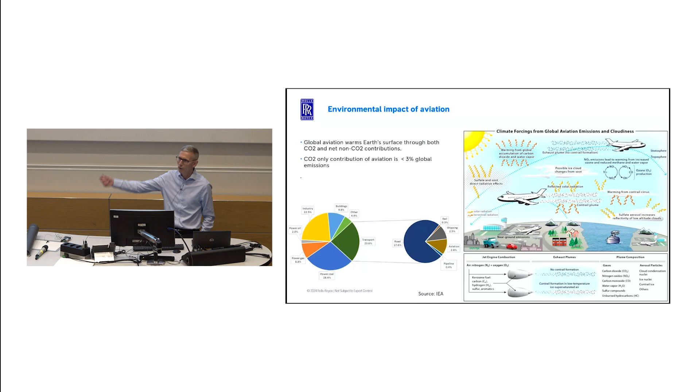Because if you lay contrails down during the day, then that's a good thing because it stops the sun coming in and heating the planet up. But if you lay contrails down in the night, that's a bad thing because it stops the heat getting out of the planet. So even that isn't a simple bit of science, and there's increasingly a lot of research going on the non-CO2 effects of aviation. And this one just shows you that.

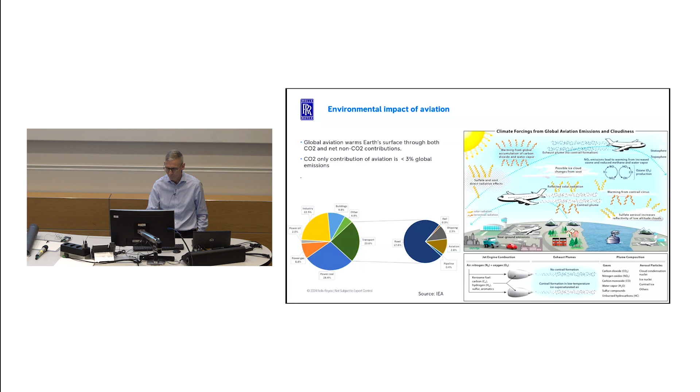But then you get into things like in-flight aviation-induced contrails that can form cirrus clouds. And there's a significant amount of uncertainty on those. So this year and last year, there's quite a lot of research being launched by NERC and by the Aerospace Technology Institute, sponsored by the Department of Transport, to really get to the bottom of that and understand it. And it particularly forms where you've got saturated air, and we think one of the contributing factors might be the particles in the exhaust of the aircraft, which cause the nucleation.

You then get the ice forming, which then can go in certain climatic conditions to turn into contrails as well. So increasingly now we're looking at that, and the impact of that could be as much, if not more, than the pure CO2 itself. So you'll hear more, I think, in the media in general about the work we're doing to try and understand and address the impact of non-CO2 effects.

And one of the things we are looking at, they only occur at certain latitudes, at certain altitudes, and in certain climatic conditions. So one of the things we're starting to think about is through clever routing of the aircraft and clever understanding of the weather, can we kind of optimize the flight path to eliminate the production of contrails.

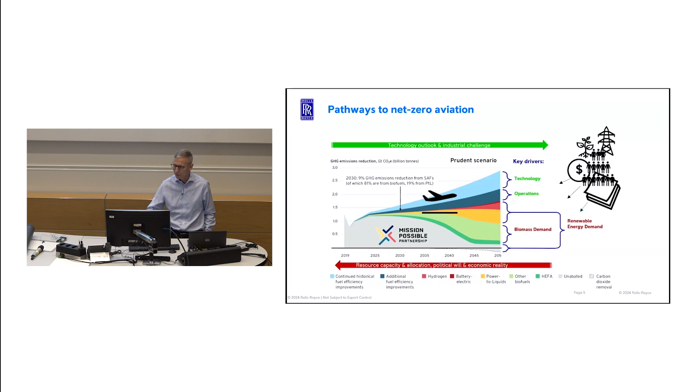And you can see that, from a technology point of view, we know the routes forward. The challenges to that will be making sure we've got the right amount of resources available to the industry and the political and economic will to get on and do it. And so part of our role isn't just about developing the technology solutions, it's working with governments around the world to say, look, let's have in place the carrots and the stick to incentivize the operations in a zero carbon world. So what are we in Rolls-Royce doing about it?

Typically, us and others divide this into three basic component parts. One, it's kind of a bit shorthand, but the best fuel is the fuel you don't use. So what we're trying to do in the first place is continue to improve the engines and the aircraft around us. And despite relatively modern aircraft and engines, we still see significant opportunity for improvements in the fleet of the aircraft and the engines around us. So that's kind of the first pillar that we will continue to address.

Then increasing uptake of sustainable aviation fuel, and we've been doing some work which I'll come on to in a moment, making sure that our engines are 100% compatible with sustainable aviation fuel, so that won't be a barrier to it. Technology won't be the barrier. And then finally, we're also looking at zero carbon solutions such as hydrogen and electrification, and those are the ones that we're working through. And in fact, in many cases, they are well advanced in some of our demonstration activities.

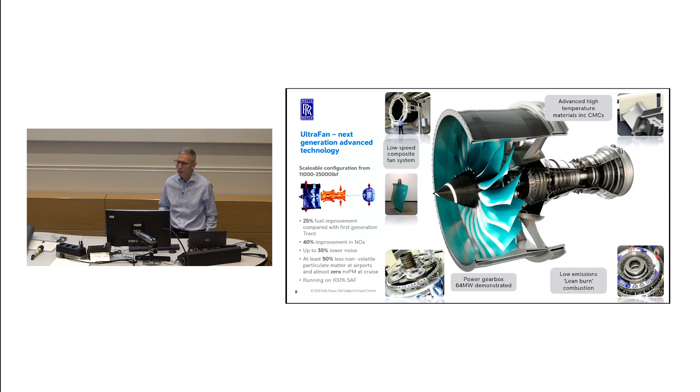High temperature materials, including ceramic matrix composites, and down the bottom there, to ensure that we minimize our environmental footprint, what's called a low NOx, a lean burn combustor. So really investing heavily in technologies for the next generation of engines. And that's what it looks like coming into the test bed. We first ran it in April last year, and then ran up to full power later on.

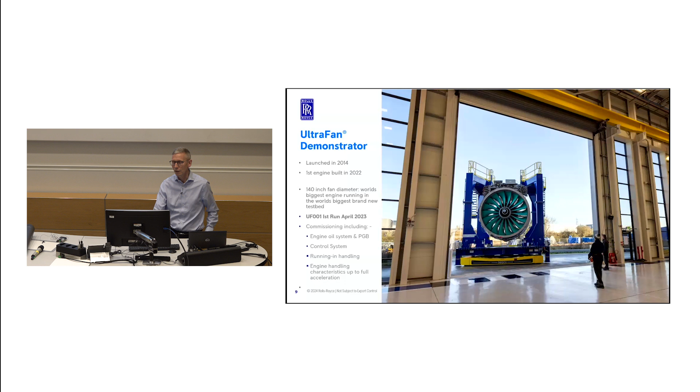We had to build a new test bed for it. This is up in Derby. It wouldn't fit in any of the test beds that we've got on site, so we built a brand new test bed for it, which is an enormous construction. And you can see that's the inside of the test bed with an engine. So that's a 3.5 meter fan on it there, so it gives you a size and scale of the test bed that it runs in.

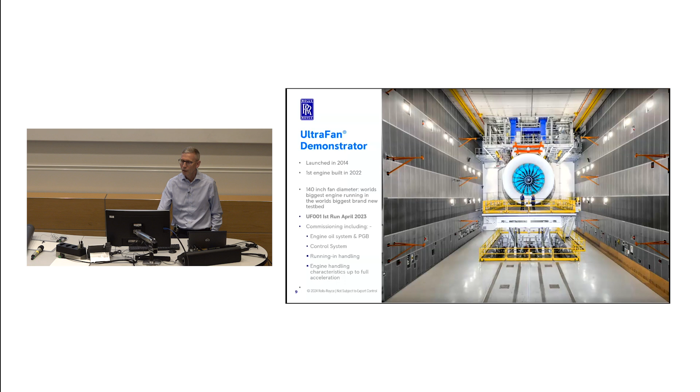We ran it a bit like, you look at some of the old films of the Apollo days, we actually ran it like that. That's the third line of defense control room. The first line of defense is the driver, who sits there with the throttle. It's actually a mouse these days, who drives the engine. Then you've got the immediate test support crew, and these are the back office guys doing all the analysis, looking very nervous there as the engine starts up and runs up to full power.

And we actually ran that up to 85,000 pounds of thrust. That's the same as you would see on a very large wide-body twin-engine aircraft today. So we've demonstrated that kind of thrust, and we've done a significant amount of running so far, and lots of data that we're chewing through at the moment to understand how it performed. But very, very satisfying.

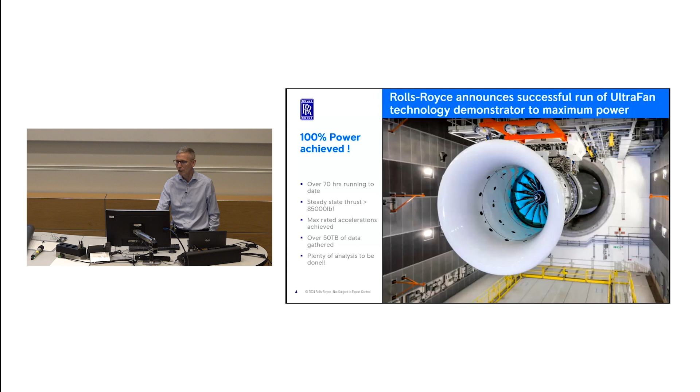This is a program that's been, it's an idea that started in about 2013, 2014. We've gradually taken it through the design process, and now we've got that realization of this engine which delivers these world-leading fuel efficiency and indeed environmental credentials. So that's what we're doing to develop current engines.

We've done demonstrations using used cooking oil and fat, as I mentioned. You can also use municipal solid waste, convert that ones. Agricultural waste in terms of alcohol to jet, oils, fats and greases, and then algae as well. So we're looking at all of those, and all those pathways are cleared, and we're developing those as we go through. Now, clearly, one of the criteria that us and the rest of the industry do is that none of these feedstocks must compete with land use for either food or for water. So make sure we grow them in areas where other things won't thrive.

And we're actually looking at 2 things at the moment. One is a kind of drop-in spec, so the production of these has to be consistent with today's aircraft clearance requirements, if you like, but also what we call JetX, which is a fully synthetic one, which will require a different solution. Today, engines are certified to accommodate up to 50% of this fuel, but we've been doing work to prove that they can be safely run and reliably run on 100% sustainable aviation fuel.

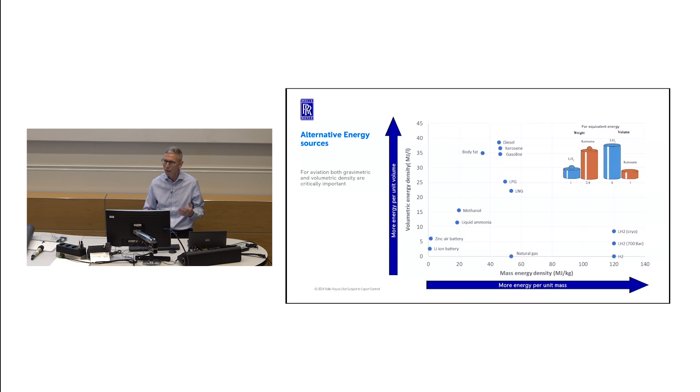You want to go long distances, so ammonia might have a place there. So again, the industry is looking hard. On one side, we've got hydrogen, which is a very simple molecule, which is very difficult to handle because you need to keep it very cold. And on the other hand, you've got this complex hydrocarbon, which is expensive to produce and make. We're trying to work out if there's anything in between that might suit the needs of aviation.

And one of the things you come back to: thus far, the world has been quite simple. We've had kerosene, you deliver it to the aeroplane, you have some kind of infrastructure and you use it in your aeroplane, very straightforward. And if we go down the sustainable aviation fuel route, it has got significant advantages because it's a drop-in solution. I'll need new refineries to produce it, but I don't need to change my infrastructure at the airport, and I don't really need to change the engines of the aircraft. It's very much a drop-in solution.

Another one is power-to-liquid SAF. That basically allows, if I capture CO2, I've got my source of carbon, then if I combine that with hydrogen, which I've electrolyzed, then I've got a truly synthetic fuel. And again, that will be a drop-in solution. The other thing I could do, if I'm producing hydrogen, I could look at using that hydrogen directly, either through a fuel cell or indeed burning it in a jet engine. That's one of the other things we're looking at.

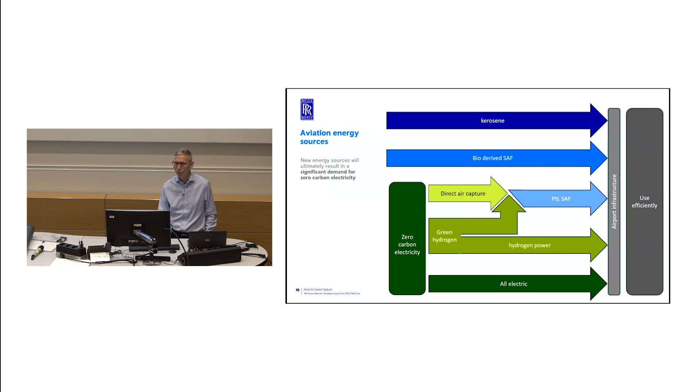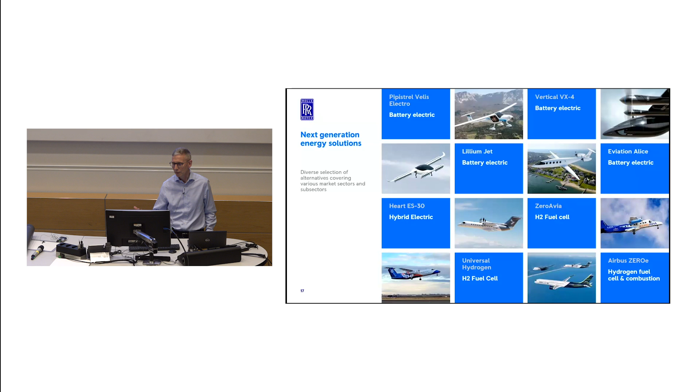The International Energy Agency says that it'll be about 23% in 2050, 45% bio-SAF, power to liquid 30%, 2% hydrogen. You can see those vary. But I think the point of showing this is we know bio-SAF isn't the solution. It's not going to fill all the demands of aviation, so we're going to have to do something else. That may be a power to liquid SAF, a fully synthetic SAF, or indeed it may be hydrogen.

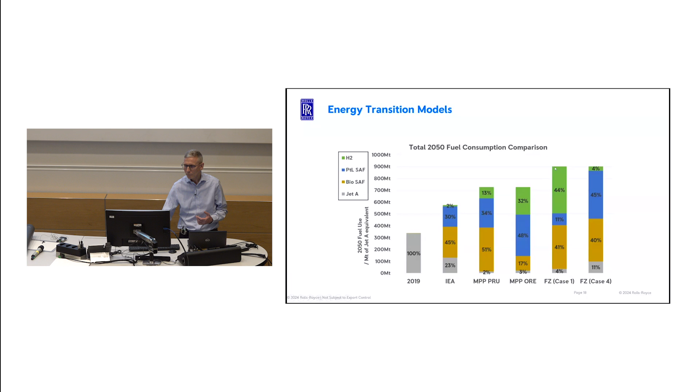And now if you've got hydrogen, as I said before, it's your input ingredient for your e-SAF, if you like, or your e-fuel, or indeed you can use it directly in the turbine. And so how do those pan out? We tried to put this together because of all these diversity of opportunities, if you like. What do we think the future will look like for the various competing energy sources and propulsion system solutions?

So today, the ubiquitous gas turbine really covers the whole range, right from commuter aircraft all the way through to the large transatlantic and trans-Pacific wide bodies that you fly on today. Now, clearly, if we substitute that for a drop-in solution, then the properties of the fuel are such that it doesn't really make any difference to the operation of the aircraft.

But when you start looking at some of these more novel solutions, for example, urban air mobility, then we see really relatively short range applications, low numbers of people. And on the charts I showed you earlier, typically 2-4-seaters. You may be able to extend those by a hybrid solution where you take a small gas turbine, combine that with a battery, for example, and gain a bit more range, or indeed, as many others are doing today, looking at fuel cell solutions. And they could begin to get into the regional market, so 80, 100-seat type aircraft. That could be a real opportunity for fuel cells.

If you want to fly further on a true zero-carbon solution, then you want to put those through a gas turbine, and that will allow you to go well into the narrow-body sector. And there's no fundamental reason why you shouldn't fly long distance on hydrogen, because the longer you go, the more fuel you've got, and the bigger the benefit for a lighter solution. The challenge, therefore, then becomes accommodating the volume on a very, very big aircraft. But nevertheless, we see that as one of the solutions in the long term for longer range, more mass transport solutions.

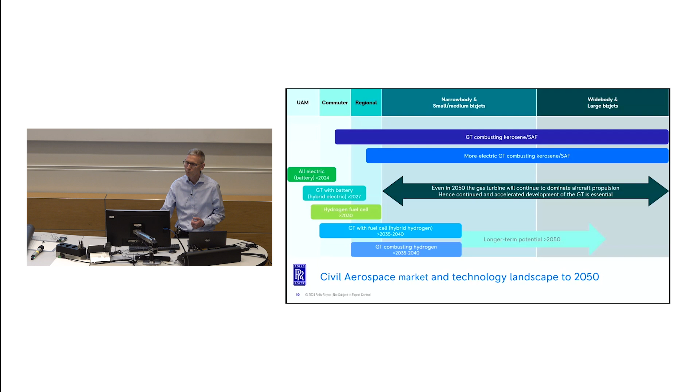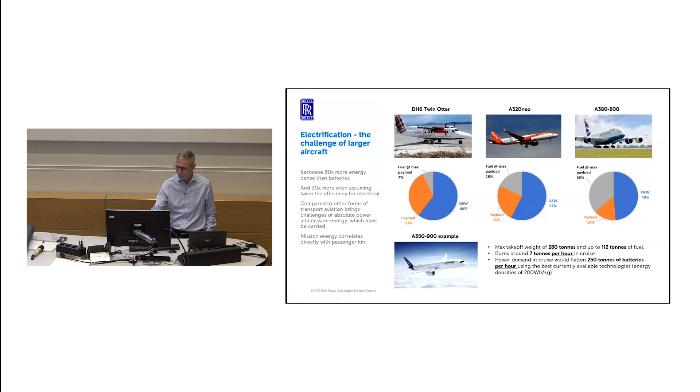So one of the things we're looking at is hydrogen. As I mentioned, from a gravimetric point of view, it's a very energy-dense solution, albeit we've got to accommodate the volume. Whereas a SAF, a sustainable aviation fuel, is a relatively simple solution because I can drop the fuel into the existing infrastructure at the airport and indeed the existing aircraft and the existing engines, once you shift to something like hydrogen, it's a significant challenge. I've got to change the whole infrastructure in the way I produce it, but also in the way I fuel the aircraft and the way I utilize the aircraft as well.

Because, as I showed you in the earlier charts about the density of gaseous and liquid hydrogen, the only way that hydrogen is viable for long-range flight is in liquid form. And to get it into liquid form, you've got to store it at minus 253 degrees centigrade. So that's your first challenge, how I handle that. In terms of the logistics, you're not going to pump liquid hydrogen around the world. You're probably going to store it on site. So you're going to need some way of converting gaseous hydrogen into liquid hydrogen on site and then supply that to either tanks or by the side of the aircraft.

So from an aircraft point of view, you've got to store it. So you need very, very well thermally insulated tanks on board the aircraft. And then from an engine point of view, we've got to pump it. Nobody makes pumps today that can pump liquid hydrogen at the kind of flow rates, pressure ratios and lives that we need. Yes, people do it in rockets, but at different flow rates and pressures, and the life is nothing like you would need for a typical commercial aircraft operation. Then you've got to heat it, because it's at these very low temperatures, before it goes into the gas turbine. And then you've got to demonstrate that you can combust it.

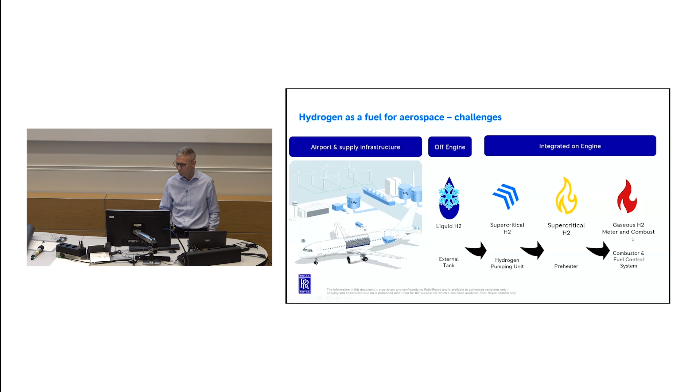And we've been working on this. We've got a whole load of programs. You can see we've done the fundamental analysis: does it work from an energy point of view? And we've done some early proof of concept work. And then we're developing the technologies, but also doing some integrated system testing: does it all come together? And we've put in place a program where we're working through those. We've already done a fundamental concept demo, and we've got 3 programs in place.

One looking at how you burn it, one on how you handle it, if you like, and how you control it, and the other one, how do I integrate it onto an engine? And then finally, we'll bring all this together on an integrated engine test program.

We're doing that through a combination of UK and European programs, both in Germany and in the UK, through Clean Aviation, and also with our partner EasyJet on there. And you can see a significant number of university partners and others, including some well-known universities down the bottom here, who are helping us on this journey, because we haven't got all the answers at this, and we need the best and the brightest brains around Europe to help us with that.

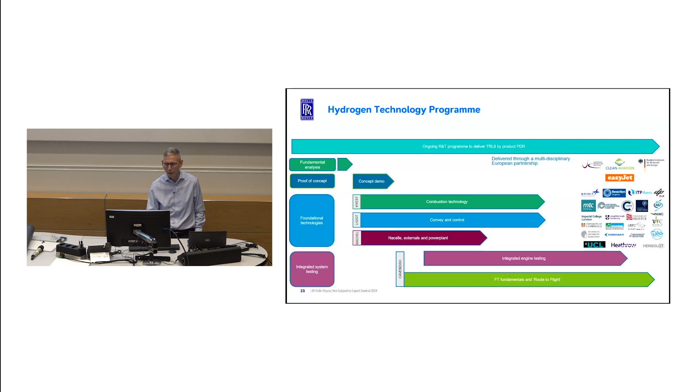And so where we've got to on this program, we've done a significant amount of testing already. That strange thing on the top left there, it's a gas turbine. Typically you would find that in a small regional aircraft. It's also the engine that powers the C-130 Hercules, if you've ever seen those military transports flying around. We basically converted that to run on hydrogen just to prove that we could.

We've also been doing a lot of work looking at how you combust it. This is a test rig in Cologne in Germany, looking at fully representative pressures and temperatures. The one down the bottom there is a rig at Loughborough, where we've been working at how we do the fundamentals of combustion. And what we're going to do by the end of this year, we will have built an engine which will be ready to run on gaseous hydrogen, and we're going to take it out to the NASA Stennis Center next year and run it on gaseous hydrogen.

And that strange thing down there is the pump. I said it's one of the biggest challenges. That's ice forming on the outside of the pump there. That's only running on liquid nitrogen at the moment. The plan is to take that further and run on liquid hydrogen, but you see some of the challenges that you face on that one.

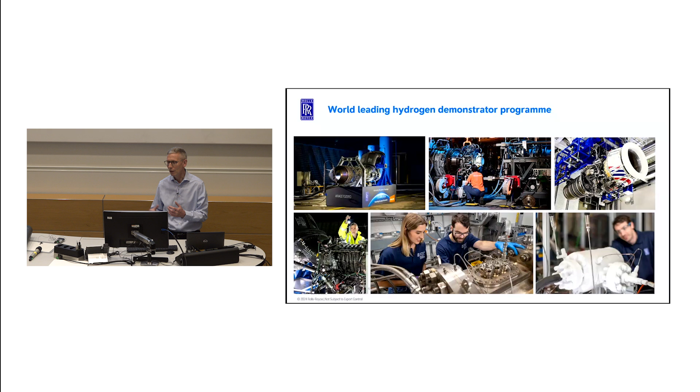So a long way to go, but fundamentally we are trying to understand what the various challenges of that system are. Interestingly enough, the combustion is relatively straightforward. I mean, hydrogen burns, I think we all know that. But you can actually control the oxides of nitrogen and get very, very good and efficient combustion. And I think from our perspective, and indeed the industry, the biggest challenge will be how you store it, how you convey it, and how you control and pump it. I think that's the challenges that the industry will face.

So if you bring this all together, finishing off where we got to, if you look at the distribution of flights and fuel around the world, so that darker green line, if you look at the distribution of flights, you can see a significant number of flights today are actually relatively short-range flights. So you can see 90% of global flights are probably less than 3,000 kilometers.

But there's this long tail of longer range flights, such that when you look at this from a fuel basis, which is this green line here, there's a significant distribution way out to the right. So the fuel gets burnt on the longer range missions as well. So you can't just focus on the short range missions. And what that means for some of these solutions I've been talking about.

So if you look at sustainable aviation fuel, clearly that's a drop-in solution that can cover the whole range of that chart. I can cover the missions right from the very short range up to the very long range missions. Having said that, if I then start to look at some of these alternative ones, for example, these very short range ones, yes, these electric solutions may be viable, but actually they're going to have a very limited applicability in terms of the market and in terms of the number of people and the distance that they will fly. So they'll have a relatively small impact on global CO2 production.

If you hybrid that, you'll get a bit more range, so you can begin to eat out a bit more, maybe sort of 10-15% of the global CO2 if you're, I think, fairly optimistic on that one. And then fuel cells, that again, a bit more exciting. If I can fly relatively long range, then perhaps up to 30% of global missions.

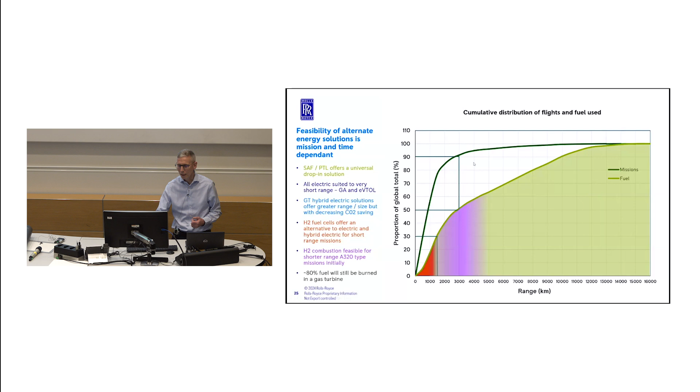And if you bring that together, just to finish off, from a Rolls-Royce point of view, we're playing in a number of these areas. So, for example, you can see I've been talking here about hydrogen fuel, hybrid electric power, and gas turbines using sustainable aviation fuel. So in an aerospace world, we are contributing right across the patch there. As I mentioned earlier, we're also developing small modular reactors. They will provide the power for some of the energy requirements we've got in the future. We are developing fuel cells primarily for energy purposes initially rather than aviation.

And the other thing we're doing is looking at our nuclear capability. We power all the UK fleet of nuclear submarines. We've got a significant amount of nuclear expertise, and we're looking at using that in other areas, either for deployable power. So if you want a remote base somewhere, either for defence operations or for civilian activities, then a small modular reactor, or a small micro reactor is probably more appropriate. We see those as really viable solutions. And the other thing is microreactors for space propulsion. That's something we are working on at the moment. We've got a grant from the UK government to look at microreactors for space propulsion as well.

And then just to finish off, given that I am sitting in the electrical and electronic department, we're doing quite a lot of work still on electrical systems because we know a lot of the solutions of the future, be it more electric or fully electric, will require significant amounts of electrical capability, and we're developing those technologies in parallel.